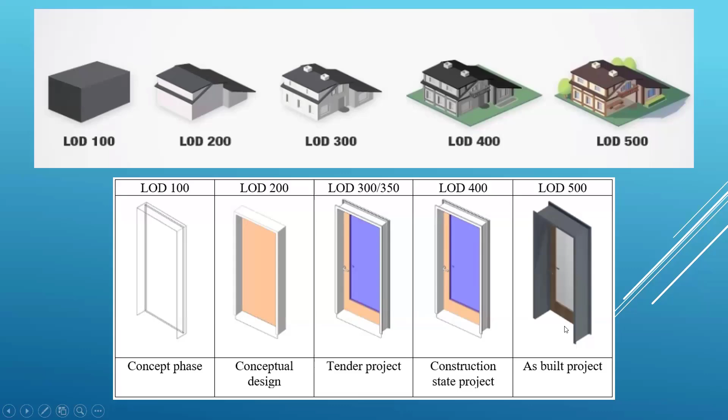So next is LOD 500. After constructing, what it looks like - it's as built. I hope you understood.

So as LOD 300 and 350 are important, I am again explaining about those topics. LOD 300 is like accurate modeling because it's a design stage.

Detailed shop drawings - shop drawings are drawings we use for the construction, given to the contractor. Elements are defined with specific assemblies. Detailed 3D modeling of building components. Precise quantity, size, shape, location, and orientation of the building is mentioned.

Precise quantity means how much quantity. Taking an example of a door, how much doors - the same quantity of door is required in a single building. The size, shape, location and orientation means is it opening inwards or opening backwards, everything.

Coordination between different trades are happening - the trades like discipline, architectural, structural, and MEP. BIM coordination and clash detection - about this clash detection I will explain in the upcoming slides. So from the very much accurate detailing, we will do that in the LOD 300, that you must know.

So next one, construction documentation is LOD 350. It represents how building elements interface with the various building systems, which is the difference between LOD 300 and 350. We explain about a door in LOD 300, we explain about a wall in LOD 300. We are actually placing that door in that wall.

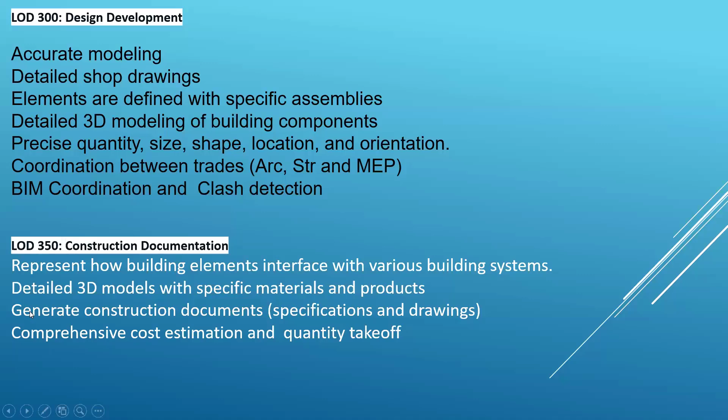The next topic is level. There are actually 4 levels that exist: L0, L1, L2, L3. L4 is some more advanced level; we don't need to discuss that.

So the LOD is the accuracy of detail we represent, but level is the level of collaboration we do in the BIM process. Normally, to get all the advantages, we have to follow Level 3 BIM. It means full integration. Level 3 BIM means the 4th level, since it starts from 0.

Level 0 is the first one. There is no collaboration. Separate stakeholders in the project do their own models and CAD files, using prints and paper only. They do their models differently and communicate only with the person they require.

The next one is partial collaboration. Everyone creates their own model, but they share their data to a common data environment. I will discuss the common data environment in the next slide. So they create their own files and data, and if required, they share it to a common type of platform — a platform where we drop the data, and everyone coming to the common data environment can get the data.

I will explain that in detail later, then you will get to know more. So just know that Level 1 is where we create our own data but share it through a common data environment. That's only it. But there is still no collaboration between the different people.

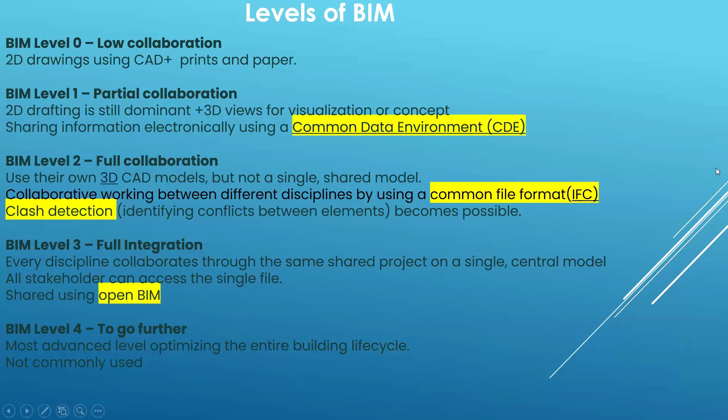The next topic is open BIM and interoperability. There's one more topic we left, that is common file format. Don't worry, I never forgot, but I'm telling you all these topics as actually a single topic, not separate. So what I'm explaining about open BIM also explains IFC.

Those IFC format files, who are we sharing them to? We are sharing it to any person who requires the data, and we share it to the common data environment. I hope you get it now. We share the data to the common data environment. From the common data environment, everyone can access and know at what stage of construction they are now.

I'm just using a representation, like an example only, a poetic type comparison. So at what stage of construction they are now can be understood by every person in the construction using this common data environment platform, and that IFC format they are sharing using a process like open BIM. Open BIM is like we can share one type of file or data to one person without harming what is the data inside.

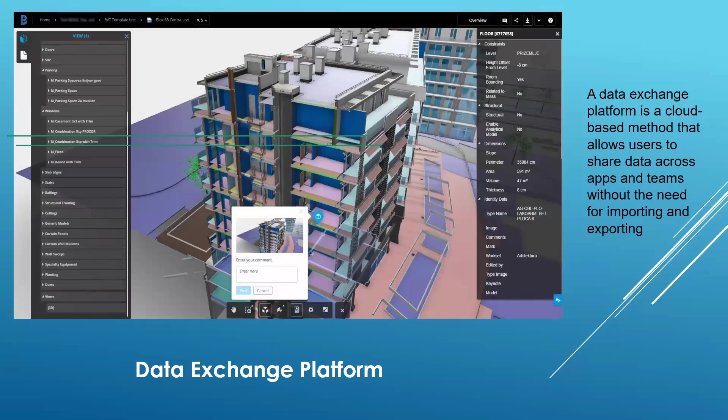Okay, we will just conclude the BIM components that we discussed. Starting with the family: what are the components we are using to construct the building?

Next is BIM LODs and levels. BIM LOD and level are two different types of classification in the whole BIM process. BIM LOD is level of detail, representing the accuracy of detail we are representing. BIM level represents accuracy of collaboration, what collaboration is required to get 100% BIM output, which is BIM level 3. BIM LOD depends upon the project, it always varies depending on whatever LOD you have to work with.

Next is clash detection. Clash detection is determining which elements of the building are conflicting and correcting it. There is more detail about this clash detection, so I will explain.

Clash detection is like I explained using a wall and stair. Hope you remember. It can also vary, like how much penetration the stair has made inside the wall. It can be 15 centimeters, 1 mm, 0.1 mm, everything, so it also varies on accuracy.

So if your client says if my stair is penetrated inside the wall by 1 mm, then it's okay, never mind. If it's penetrated more than 10 centimeters, it's a big issue. So according to that, you can solve the clash. Based on the penetration, we can measure the degree of clash.